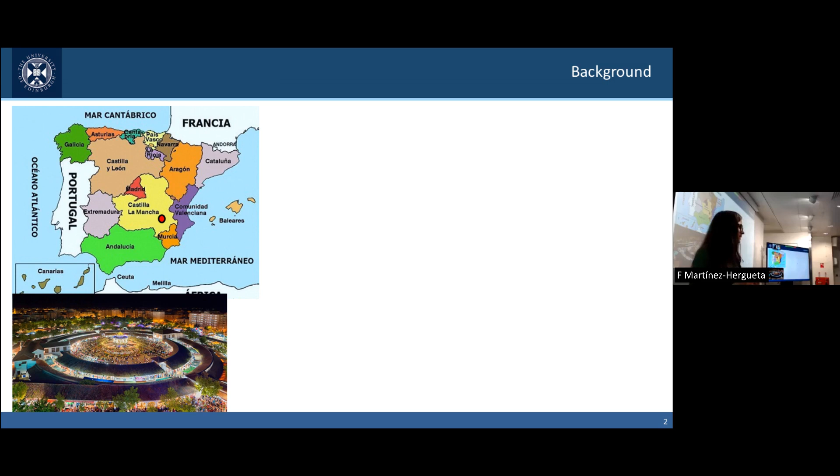Before starting directly with what we have, let me... okay. Before starting with the research presentation, I wanted to introduce myself. I'm Spanish, coming from a very tiny town in the center of Spain called Albacete. If we translate that into Scottish or Gaelic, it means the Scottish town. So that should have told me a little bit about my future. I didn't know that at the time.

I did my PhD in Madrid at the IMDEA Materials Institute, working with this amazing team of people, Javier Llorca, Carlos Gonzalez, and Claudio Lopes, on impact response of materials. After my PhD, I moved to Oxford to work in the laboratory of Nick Petrinic. You might see a couple of familiar faces in that picture.

In 2018, I took a lecturer position at the University of Edinburgh, in particular in impulsive dynamics. My work as lecturer is divided into different blocks. I've got 40% teaching load, teaching a 5th-year course in dynamics on impulsive response of materials, which is very cool, covering ballistic response of composites, wave propagation, and all that cool stuff. I'm also taking care of first-year students with a role called cohort lead, where I provide academic advice and pastoral care to them.

Apart from that, I also have 30% admin load. I'm part of the postgraduate school. I take care of the progression of PhD students, also providing advice on different internal processes we've got, and providing pastoral care as much as I can. I'm also academic supervisor of a team of amazing people.

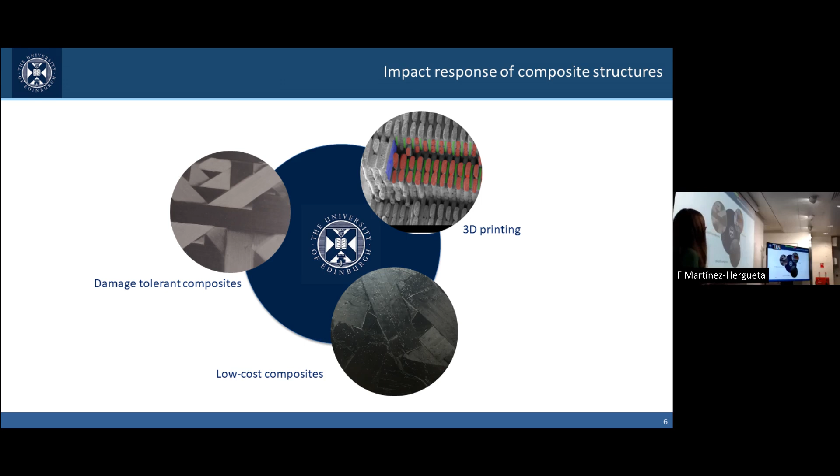My research lines right now include 4 PhD students working on 3 different topics: 3D printing, low-cost composites, which includes a huge bunch of things, and the topic I'm coming to talk about today, damage-tolerant composites for high-value applications. This is the work performed by my first PhD student, Rutger Kok. He came here to Imperial some months ago, so some of you might know him. He worked on a new preforming method that can be implemented using automatic fiber placement.

I guess the main context for this research is something very much shared by many researchers at Imperial, which is the susceptibility of composites when subjected to out-of-plane impact loads. We know that when we subject these composites to impact, they quickly lose their in-plane mechanical properties, in particular tensile or compressive strength, for example.

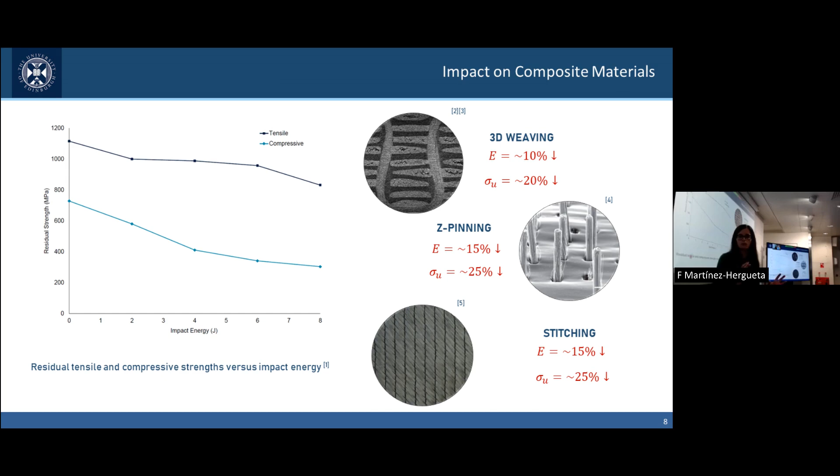In the literature, we always find approaches to reinforce these structures in the through-thickness direction. The issue is that they all result in lower in-plane mechanical performance. Generally, all these through-thickness woven composites present a lower stiffness and lower strength in comparison to others.

Automatic fiber placement brings us new opportunities to exploit new concepts in composites with improved mechanical performance and impact tolerance.

This is something that was developed some years ago at Delft University. How does it work? Instead of stacking all the layers of the composite in a conventional angle-ply laminate, this preforming method interlaces different tapes in order to create a preform, which looks like a macromechanical woven structure.

How does it work? It works by laying up different tapes. So what we do is lay up the tapes leaving a certain gap. These gaps allow us to create the preform, introducing a reinforcement.

What are the disadvantages of this technique? The main disadvantage is that it takes a lot of different steps to create a laminate that otherwise you would be manufacturing with 4 steps.

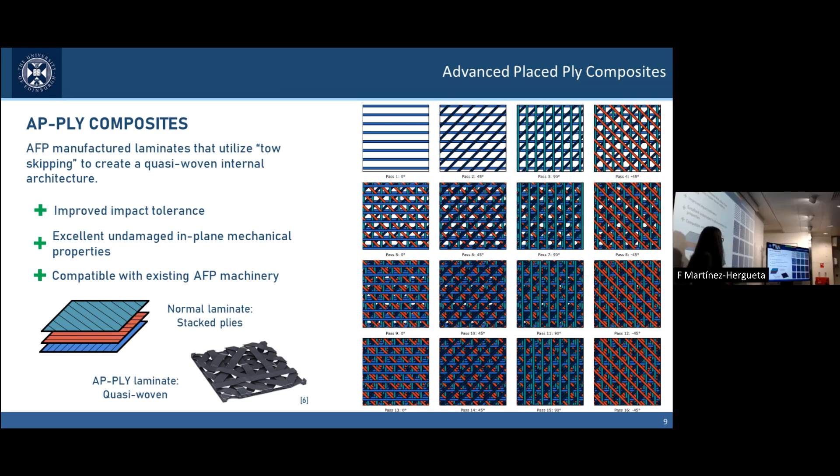But the aim of this research is to explore whether there is an advantage in using these preforming methods when we would like to improve our damage tolerance. This was already investigated previously and developed by Delft University, but their scope was rather limited, just in the development of the technique.

The research objectives we propose for this job are to focus on the characterization of the deformation and failure mechanisms to provide a better understanding of the response to impact. Knowing that, we would like to improve the design and architectures of these composites to enhance their damage tolerance.

In order to do that, we also would like to propose some numerical tools that can help us assess those failure mechanisms and provide a tool that we can use for stress analysis of large components. In order to do that, we propose the following program.

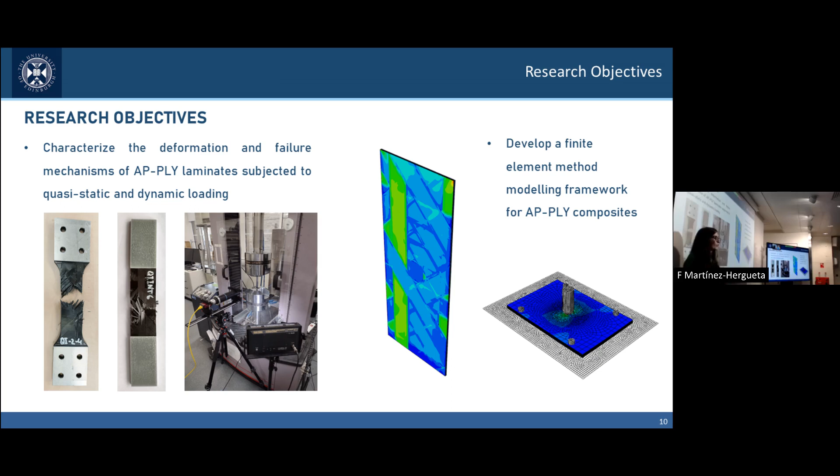First step is to determine the micromechanisms there, so we have proposed some micromechanical characterization. Afterwards, I will go through the numerical modeling methodology. Subsequently, we've got some quasi-static characterization to validate our models.

Later on is where I will introduce the relevant topics for this talk, which are the dynamic and impact response of these composites, that are mainly the novelty of this thesis.

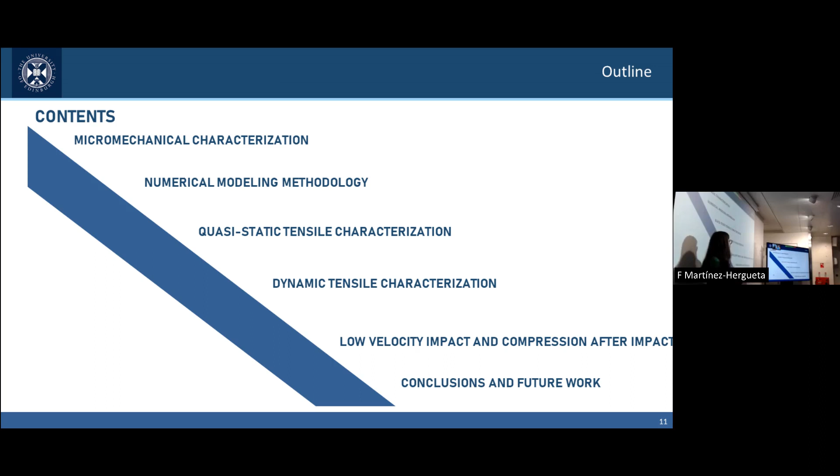The micromechanical characterization directly focuses on the response of these undulations that are repeated over these AP-PLY composites. We manufacture a laminate that introduces one of these undulations, and we can observe that there are 3 different sections over there.

Our tensile direction, our loading direction, was axial to this undulating tow. That's the direction of testing. We also have non-undulating tows that are perpendicular, and we always have a resin rich region that is originated somewhere near here through the resin flow.

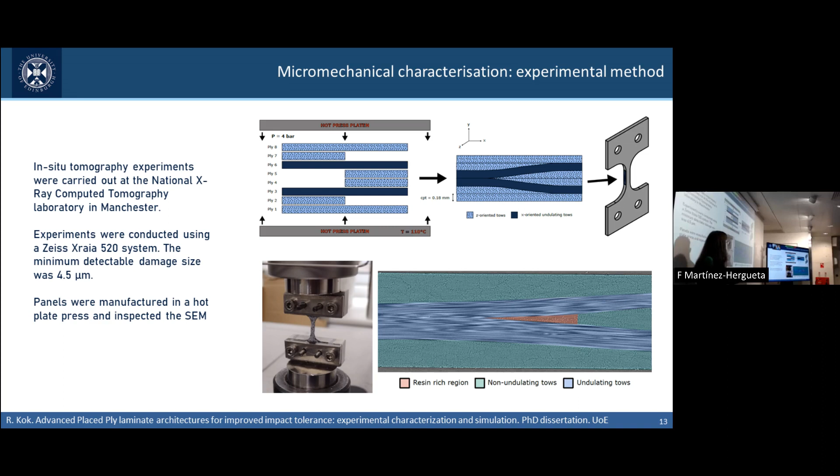We measure the crack density for different loads, at different steps, until final failure that was in between 1500 and 1600 Newton. The main failure mode we characterize for these loads is matrix cracking. All these cracks appear perpendicular to the loading direction, and they increase exponentially with load.

What I would say is interesting to appreciate is that the first crack originates exactly at the undulating point. That means the undulations are going to present strain gradients that have a detrimental impact on the strength of these composites. We can already see that happening here. All the rest of the cracks are mostly perpendicular.

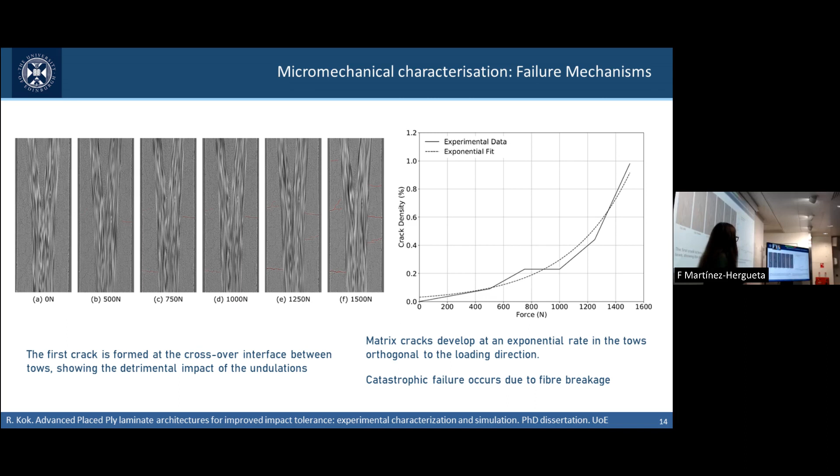This is not the same study — it was an MS thesis, not exactly the same laminate. It's missing a 90-degree layer on top and bottom of this. But these figures allow us to characterize further failure modes.

We can see that catastrophic failure occurs due to fiber tension, and it's at very specific points. If you analyze it by finite element analysis, it is clear that damage is triggered at points with particularly large strains, where there's a very large strain gradient originated.

Another failure mode that we can appreciate, triggered mostly at the same time as fiber failure, is delamination. All the previous cracks that were perpendicular to the loading direction go through the tow and originate this characteristic debonding. So what we end up with is a structure where all the tows have been debonded.

This means that these laminates present three different failure mechanisms that are relevant and that might need to be included in any numerical model: matrix cracking first, and then afterwards tow debonding or delamination and fiber failure.

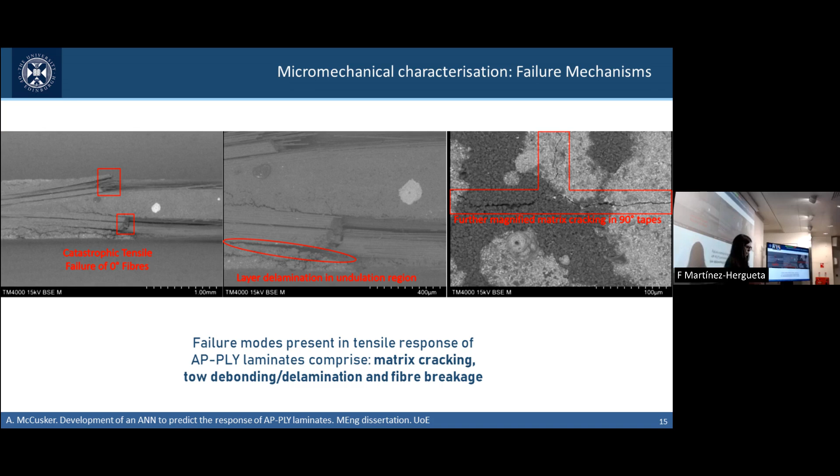So with that information, we try to recreate a model that could capture all that mechanical response. But the first issue we face is that the geometry of the AP-PLY laminate is already quite complex. When lining up individual tapes, we end up with undulation geometries that might not be straightforward. You might be able to predict the second layer, the third, but when you interlace more and more, it just gets way more complicated.

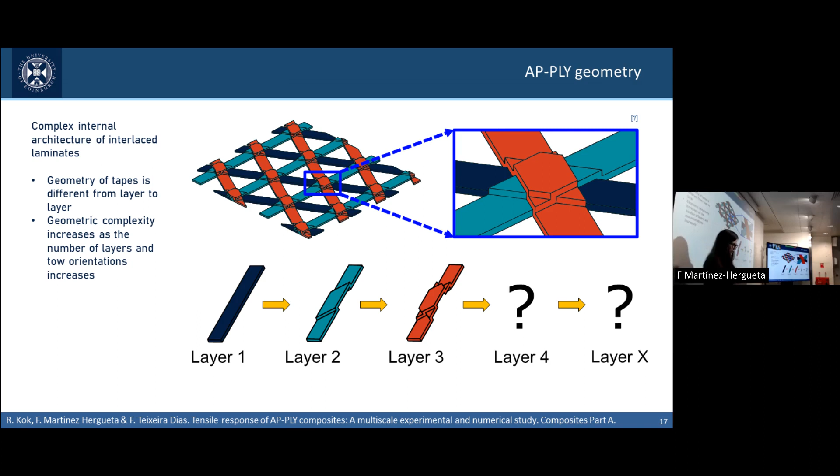So in order to conduct such research, we proposed a multi-scale model that simplifies the undulation regions, creating an idealized geometry that includes a particular undulation region that I will explain later. All the rest of the material is represented or modeled as a conventional composite, as has always been done, where we just include the material tow as it would be on a conventional fiber in a conventional way.

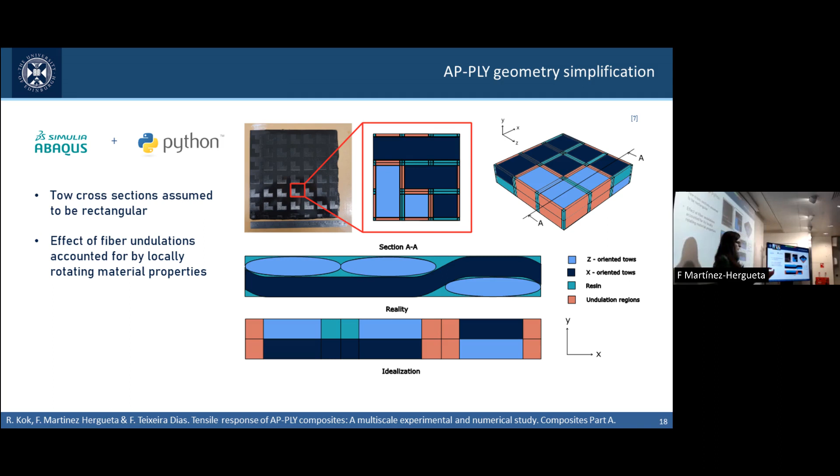These undulating regions can be represented with four congruent sections that contain either two tows or a tow and a resin rich region. So some of those tows in these unit cells are undulated. We have introduced the undulation following the equation shown there, as an average, and they work as unit cells.

So we consider the volume of each material in each unit cell, and we do the volume integral in order to homogenize the response. The undulation itself can be represented with two unit cells. The rest of the unit cells, the straight fiber tow and the resin rich region material, represent the rest of the material. When you use this approach, the main advantage is that the undulations can be represented with four single elements. This is what I'm showing in this figure.

You can see the white regions represent straight tows, regular material. All the rest of the regions represent the interfaces. There are a lot of colors, mainly because there are a lot of different configurations - angles crossing over - and that is what we represent.

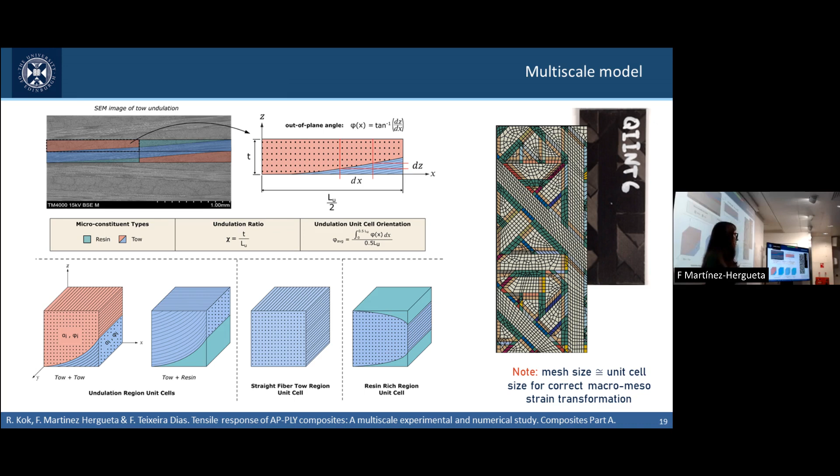The main message here is that the number of degrees of freedom, number of elements, is relatively low compared to a micromechanical approach. That means that this approach can be implemented for large scale applications and large models.

We were talking before that we wanted to introduce the failure mechanisms as well. These failure mechanisms can be implemented using any single model that you would like to apply. Rutger tried thousands of them - these are the ones that gave us better stability for impact. So our intralaminar material behavior is included with two different models, a tow model and a pure resin model.

The tow model is a transversely isotropic model, the conventional one, with a 3D Hashin failure criteria. It might not be the most accurate one, but what we found out is that it was quite stable, and that's why we finally went for this one.

Damage dissipation follows exponential and linear laws depending on the failure mode, described over here. We've got exponential laws for fiber failure and triangular laws for matrix cracking. That means this model has already implemented two of the main failure mechanisms we described before, matrix cracking and fiber failure. We are missing tow debonding.

For tow debonding, we just implemented the cohesive surfaces that are already available in Abaqus, as this could have been done for a regular angle-ply laminate.

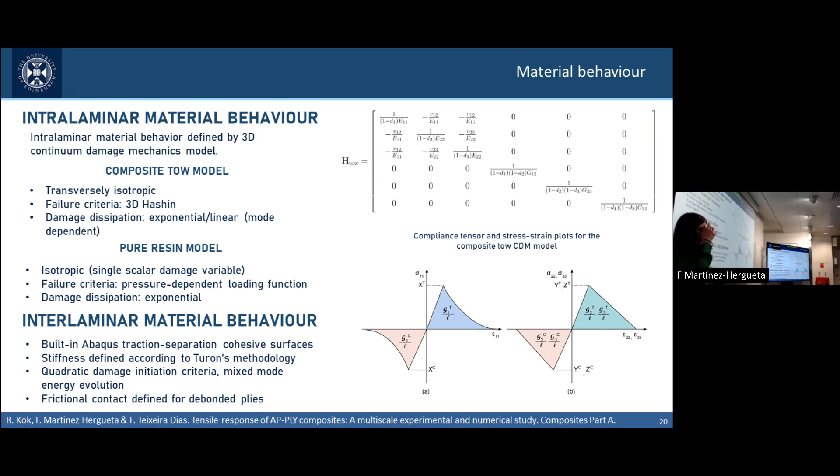And he's happy to be contacted if there are any questions about it.

Once we have that, the first thing, of course, is to validate our models. In order to validate, we manufactured our two first advanced placed ply laminates. But in Edinburgh, we sadly do not have an AFP machine, so Rutger manufactured them by hand. You can see there the work he performed. It was tedious, but it was okay.

He designed two different preforms: a quasi-isotropic one with angles at 0, 45, 90, and minus 45 degrees, and a cross-ply laminate at 0 and 90 degrees. The tow skipping parameter, which reflects the number of tows that goes in between the passes, is 3. That can be defined, and in the paper we have explored what happens when you change that skipping parameter.

We also manufactured some baseline angle-ply laminates, just using conventional layers for reference. The material we employed was a carbon fiber epoxy, and we manufactured them by hot pressure in a hot plate press. Something to mention before going into the results is that since we are using tapes to create a mesostructure, we might end up with...

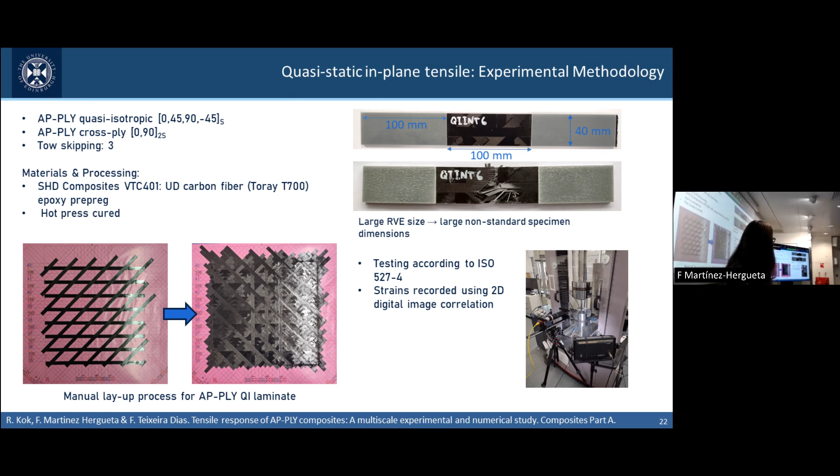...relatively large representative volume elements, and we need to consider them when creating our coupons. So we might need to adapt the current standards we are using to be sure that at least one representative volume element is contained. That means our samples are slightly bigger than the conventional ones, with 40 millimeters width.

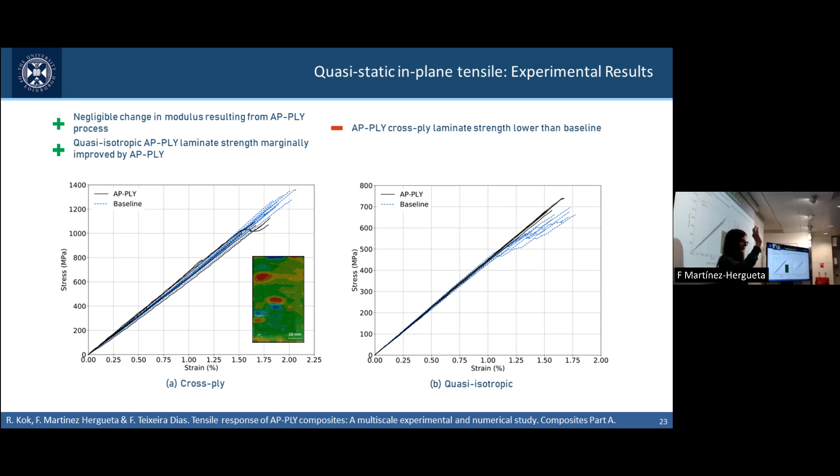So in order to explore what was happening and why there was a difference in mechanical response, we also employed our numerical models, and first we validate them. This that I'm showing is just the validation of the numerical models. We conduct the numerical characterization and analyze the response against the experimental results. We can see that in any case, we are always capturing the stiffness.

In the case of the cross-ply laminates, we can also capture decently the maximum strength and the reduction in strength due to the undulation. In the quasi-isotropic laminate with the baseline, we can also capture the softening due to matrix cracking. It's a little bit more complicated to capture the strength of the AP-PLY laminate, because our models have a reduced number of finite elements within the undulation regions, and as the complexity of the architecture increases, the accuracy of the multi-scale model decreases. But let's say we are still in a decent range.

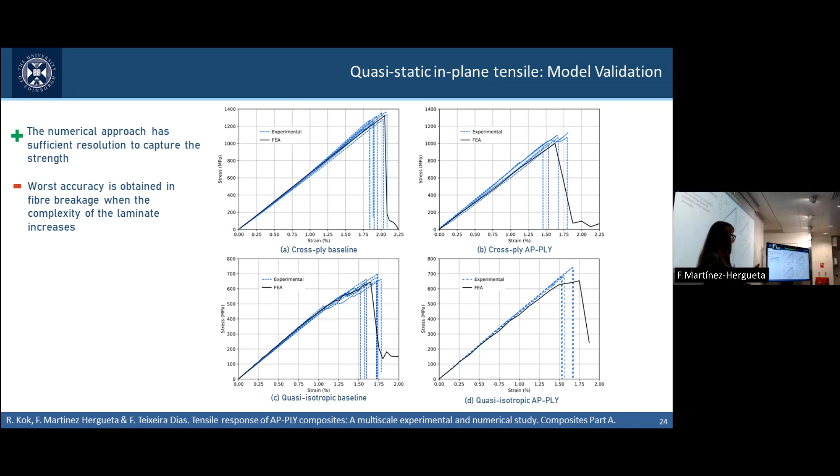So we use these models to give some understanding of the laminates' response. It is evident that the cross-ply laminate failed due to fiber failure. We can predict the kink cracks that occur through the undulations. It's also interesting to see the pattern of matrix cracking over both laminates. In a conventional cross-ply or quasi-isotropic laminate, matrix cracking is spread all over the laminate. In this case, all matrix cracking is within the tow boundaries, meaning the undulations are acting as crack arrestors.

And that gives us some hope that this might behave better on impact and might present a better damage tolerant response. That's the hypothesis that we've got for the improved response of the quasi-isotropic laminate. It also develops cracks, but since they are arrested within the tow boundaries instead of spread all around the laminate, they result in a linear elastic response.

That's something that we might have seen sometimes in wovens. Woven composites behave linear elastic until the onset of damage, despite having been cracked all over. If you go for some investigations on acoustic emissions, there's definitely quite a lot of matrix cracking, but you cannot appreciate it directly when analyzing the stress-strain response. This is more or less what we appreciate here. So that's already an initial advantage of these composites. Any questions up to this point?

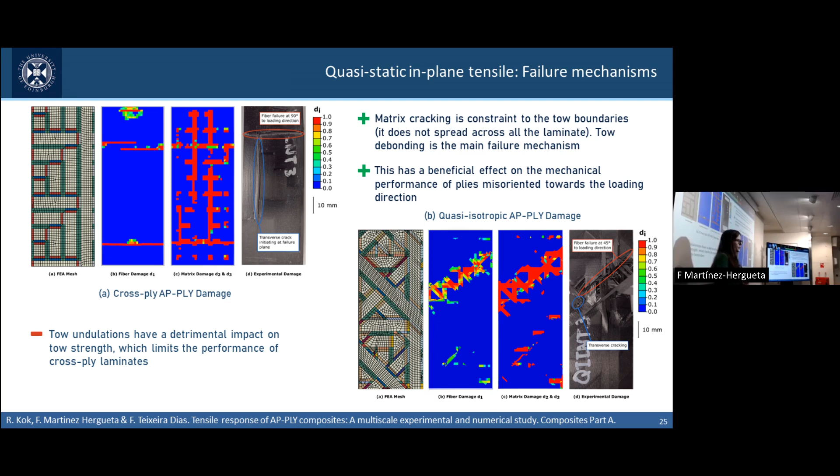So now going through the dynamic characterization, this is definitely the novelty that was not investigated before. You might have heard that composites that have defects might have a detrimental response on impact. These defects might increase their evidence when they are subjected to high strain rates. And definitely an undulation can be considered a defect.

So we wanted to investigate whether high strain rates might be detrimental for these laminates, but the issue is what I mentioned before. In order to be sure we are really characterizing the response of the parent laminate, we need to go for very, very large specimens. And in the UK currently, our split Hopkinson bars are miniaturized. They use very, very small specimens to characterize the impact response.

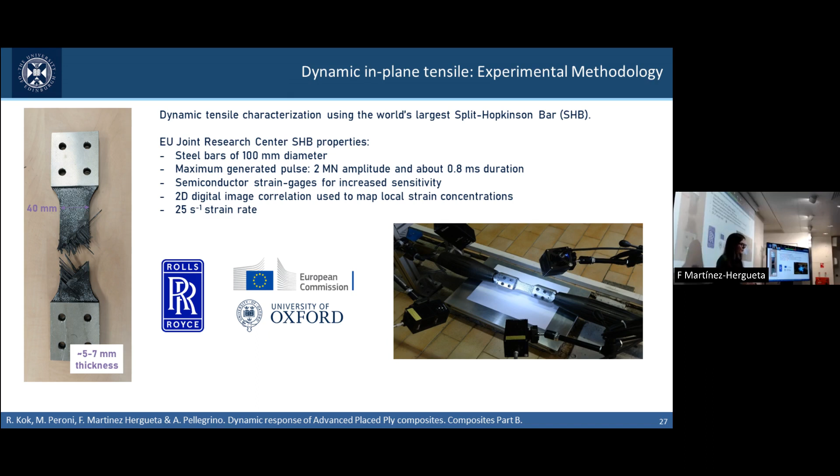So we needed to do a joint effort with the University of Oxford to apply for some European funding to be able to access the world's largest split Hopkinson bar, which is in Italy. It has steel bars of 100 millimeters diameter and a length of 100 meters. And it allows you to basically characterize the response of very large structures and components, such as the ones that we were proposing here. We characterize the response at 25 s^-1, which is usually the strain rate that you might find for low velocity impact, which is the main investigation of this work.

So the first finding, when we compare the AP-PLY laminates with the baseline laminates, these are again the cross-ply and quasi-isotropic laminates that we have shown before. They just have higher thickness, but it's the same structure. We can appreciate how stiffness is still looking the same. There's not a difference in stiffness between the AP-PLY and the baseline configuration. But very interestingly, in both laminates, cross-ply and quasi-isotropic, we find the same strength. So that means that basically the detrimental impact of the undulations that we appreciated in the quasi-static regime is not as relevant for the dynamic regime.

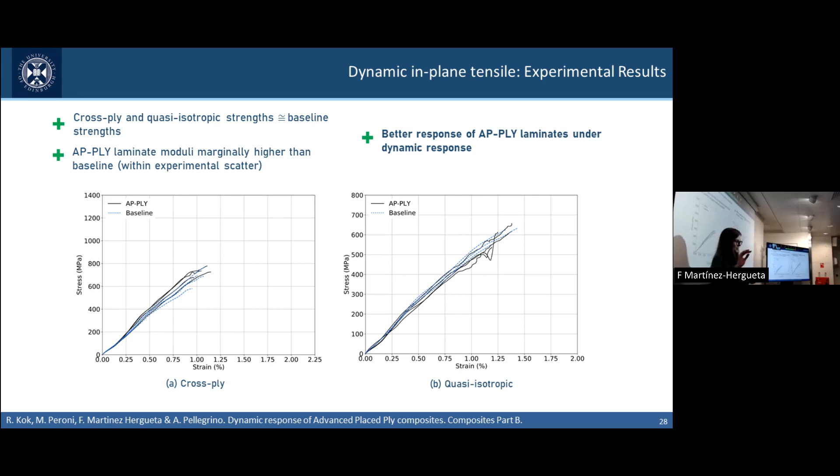So these are more or less the samples and the failure modes. Of course, the main failure mode is fiber failure. There's also quite a lot of matrix cracking, but there is a slight difference in failure modes and how they are triggered that results in an improved response. The first one might be a slightly higher strength of the epoxy resins that might delay the matrix cracking that was occurring. But there has to be also a difference in the dynamic fiber realignment.

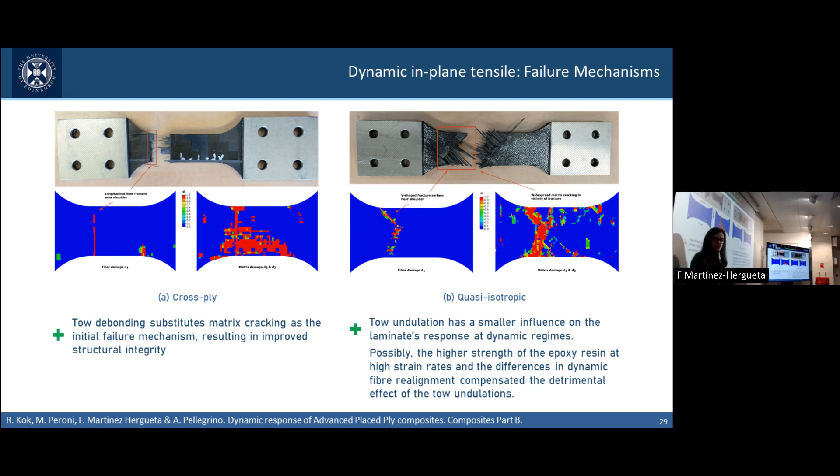So the strain gradients increase in time as the tow realigns. When we do this on a dynamic basis, we don't give time for that tow to realign. That means that the strain gradients that we were generating before don't have such a high magnitude. So those mechanisms tend to compensate, such that at this dynamic regime there is not such a high difference in tensile response on the cross-ply laminate in particular. So this is a little bit of the future work to be done. Further investigation on the dynamic fiber realignment will really shed further light on this. But nevertheless, it gives a good opportunity to further investigate these materials for aerospace applications.

And finally, this is what I initially came to share, which was the impact characterization. This was finally manufactured on a real AFP machine in Madrid. So there is a foundation for composite materials there. It's mainly sponsored by Airbus, where they've got an MTorres equipment that we use to manufacture these composites.

This machine has 8 channels for tows. The approach we used to manufacture the AP-PLY laminates was to empty half of these channels in order to create the gap. So the gap that we are using here is not 3 tows. We are just leaving one single gap. That means that if our machine had 8 channels, we were just using 4 of them.

The panels were manufactured in carbon fiber epoxy, but we used dry tows that we then infused with resin in our vacuum bag. We manufactured cross-ply and quasi-isotropic laminates as before, but we also included a third configuration, a triaxial configuration at 0, 60, and -60 degrees.

The experiments were conducted at Carlos III University of Madrid, which has one of the biggest impact laboratories in Europe. It's also mainly sponsored by Airbus. We tested at two different impact energies, 30 and 50 joules, and we also conducted compression after impact experiments to assess if there was any advantage of these technologies.

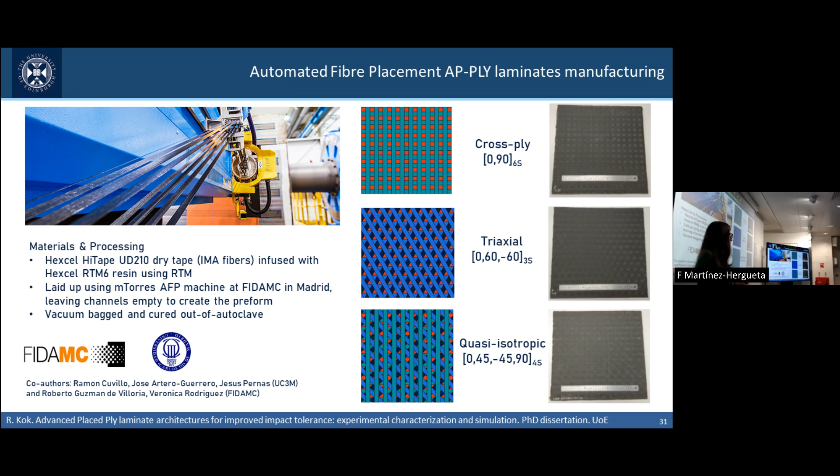Before going through, I wanted to mention that we manufactured the AP-PLY, but we didn't have resources to manufacture the conventional laminate. That was due to budget restrictions. It was a tough call, but this is the way we needed to go through.

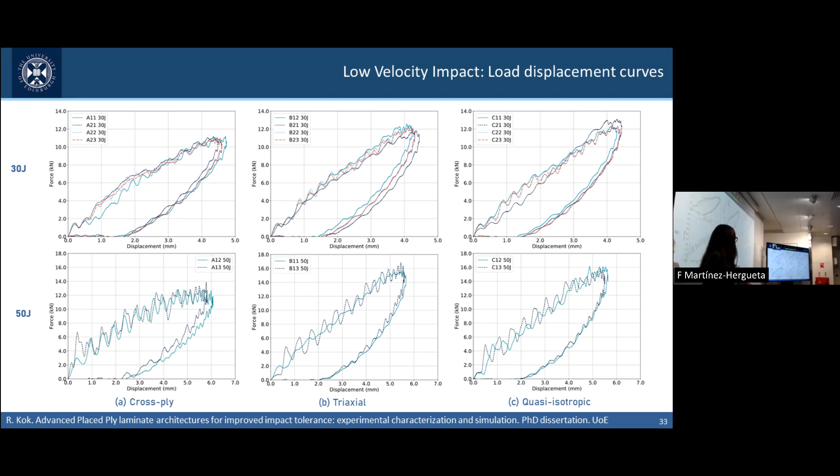Together with the experiments, we also analyzed the response numerically. We couldn't find any fiber failure for low velocity impact. The main failure modes that we characterized were matrix cracking of the directly impacted tow, and then tow debonding as we moved away from that impacted tow.

This really makes us think that the tow undulations, acting as crack arrestors before under quasi-static loading, also have a similar effect under low velocity impact.

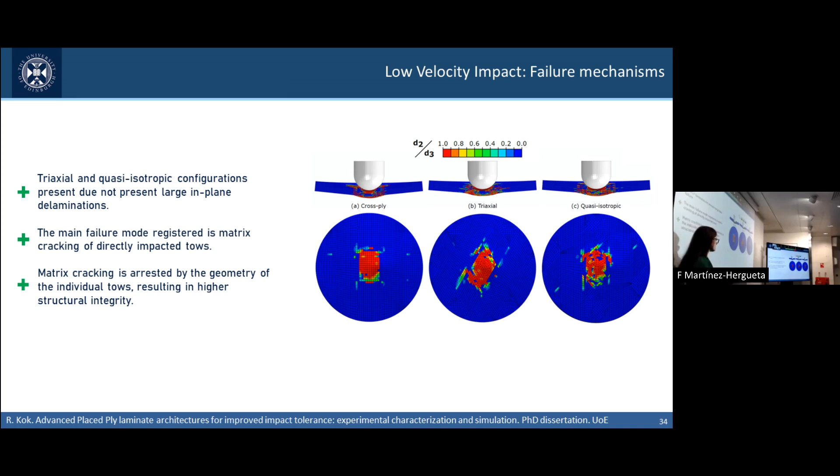When we evaluate the performance, we mentioned that all the laminates were behaving pretty much similar. When we evaluate the delamination footprints, that's something we can also find. They all present a rather circular or elliptical footprint, except for the cross-ply laminate impacted at 50 joules, which has a much larger delamination extension with a cross-shaped footprint. This means that the catastrophic failure mode we mentioned before is delamination.

Our numerical model, unfortunately, couldn't capture that failure. There is a reason for that. Delamination is driven by out-of-plane shear stresses, and those shear stresses for the AP-PLY laminate are mainly originated in the undulations.

As you know, a strain gradient to be well represented needs lots of elements. Instead of using lots of elements, we are using just four. That means we can predict there is a gradient, we will see a difference in strain, but we cannot predict the magnitude. We are limited on that. Our model is very much optimized to capture fiber failure rather than delamination.

In the literature, you will find micromechanical approaches that are very good at capturing this interlaminar delamination, but they use massive amounts of elements and are more suited to be used at materials level. So at this point, if you're going to investigate AP-PLY laminates, you need to decide whether you're going to investigate at materials level, using a micromechanical approach, or whether you want to develop tools for industry and stress analysis, where you might go for one of these macromechanical approaches.

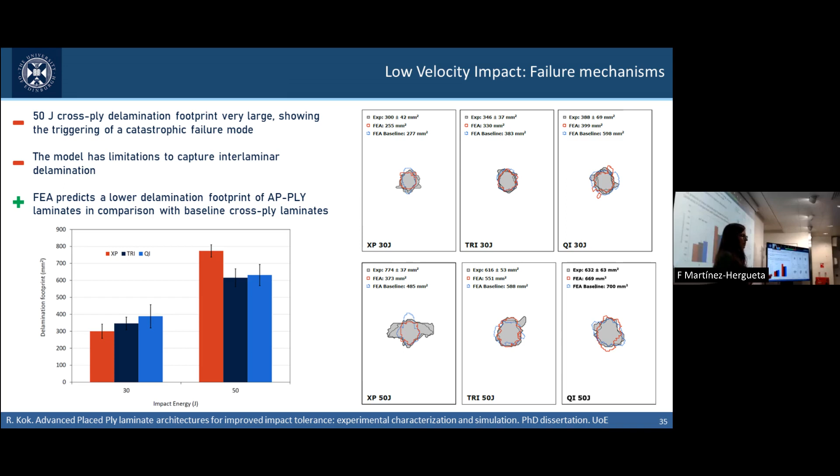So finally, just to end up, this is the last experiment: compression after impact. In compression after impact, we find 2 different trends. The triaxial and the quasi-isotropic laminate had a pretty good response when subjected to impact, losing up to a maximum of 26% of the residual strength capacity for a 50 joules impact energy.

There is a marginal better response of the quasi-isotropic laminate, probably related to the higher spread of angles we are using. That's something also extrapolated from general angle-ply laminates. We've seen that on low velocity impact, they tend to behave better with a smaller mismatch angle between layers. Marginally, the quasi-isotropic laminates have a lower mismatch angle between tows, resulting in better stability and a lower delamination footprint.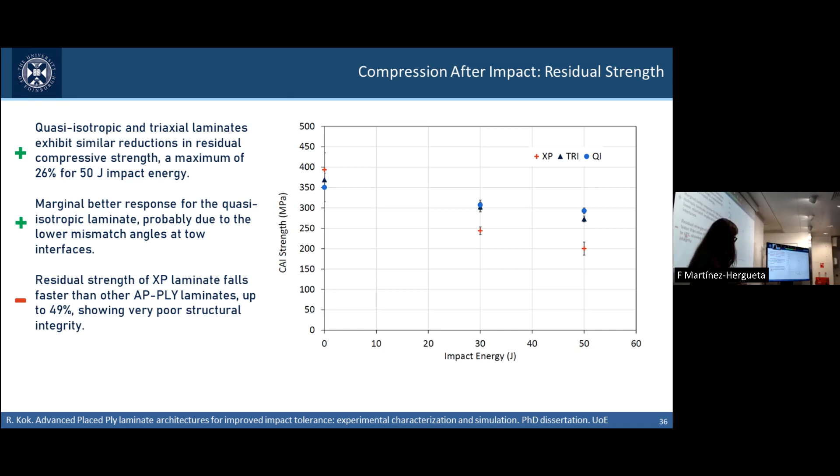The laminate with a different trend is the cross-ply laminate, with a reduction in compressive strength of 49% when subjected to 50 joules of energy. One reason it performs worse is the larger delamination footprint, but it also relates to the main failure mechanisms triggered. The cross-ply laminate presents very low stability to compression and a very clean, very straight crack all over it.

On the other hand, the triaxial and quasi-isotropic laminates present diverted crack paths that follow the tow geometries. This results in better strength and better energy absorption capacity, let's say.

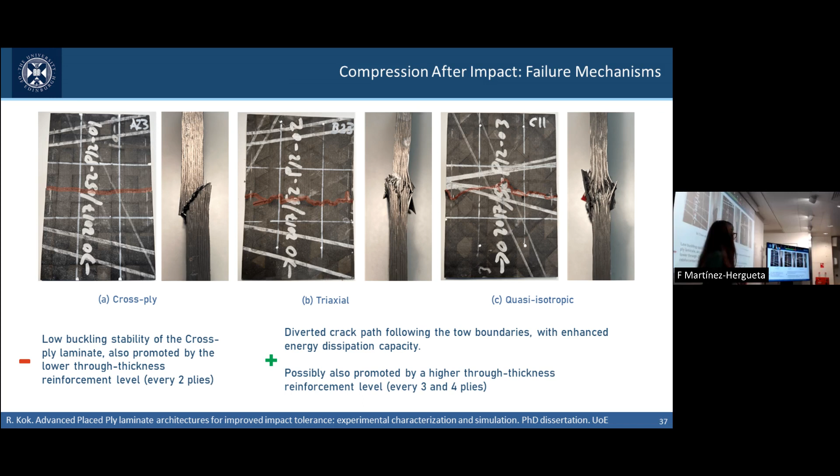There is another point to mention: the level of reinforcement. The cross-ply laminate, since we are interlacing layers, is created of sublaminates. In the cross-ply, the sublaminates just contain 2 layers. In the triaxial and quasi-isotropic, they contain 3 and 4 layers. There is a higher level of reinforcement there, which probably also gives us an advantage with the quasi-isotropic laminate.

And yeah, this was my last slide. I think this is just right on time for questions.

As a summary, we evaluated the mechanical response of different AP-PLY laminates and shed some light on the main deformation micromechanisms. We found that the response is slightly better at high strain rates, mainly because the undulations can act as crack arrestors effectively. That results in lower delaminations when subjected to low velocity impact, with better stability of compression-after-impact response.

That was the job performed over 4 years of a PhD student, and of course there is no thesis that ends up having no future work. So we didn't evaluate all the possible scenarios that we might find in these kinds of structures. Compression loads are quite relevant, and that is something to be investigated.

The AP-PLY architecture can also be combined with conventional angle-ply laminates, which are much cheaper to manufacture. It can be interesting to evaluate how to use this and optimize the application for different scenarios. Numerical modeling can also be improved.

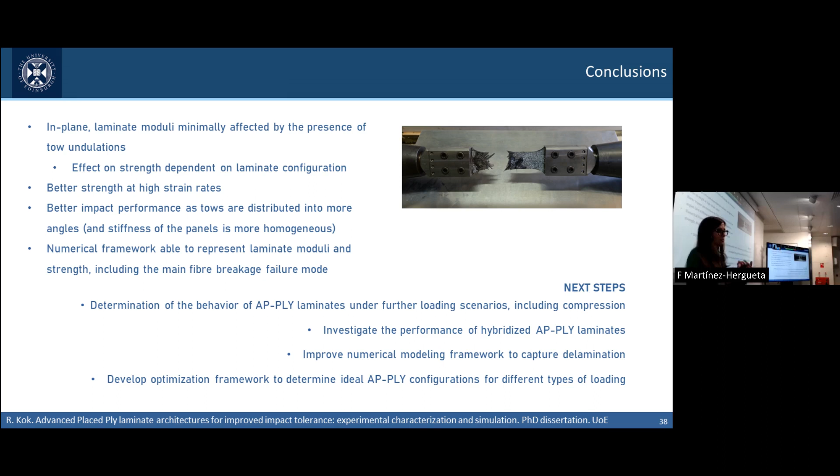So if you are in a company, your question will be: what will you give me for this problem? That's something we could work towards in the future, an optimization framework that can give you the actual better configuration with better response.